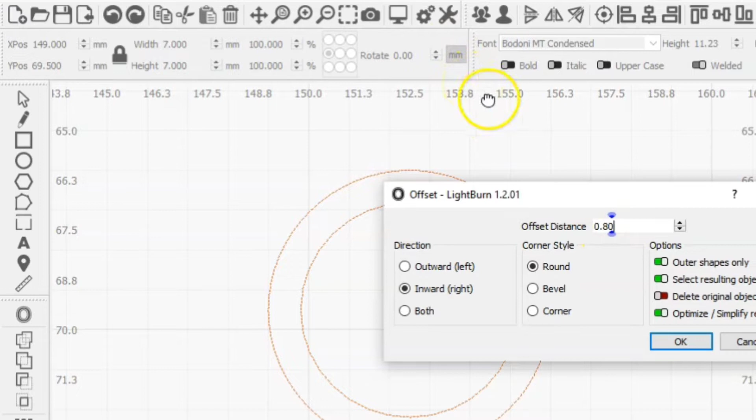Okay, now I'm going to select those two and group them. That's going to be a tool we'll use later to determine the position of the hole we need for the earring hardware. All right, so now...

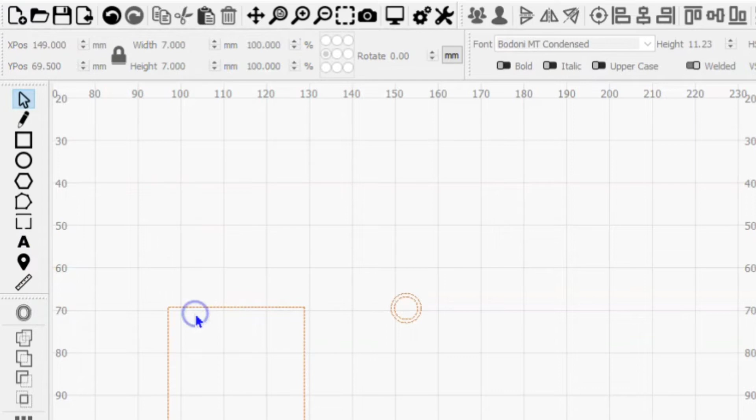Let's start our design. It's going to be on, I don't want to put that on cut path, put that back on the tool path. Select our cut path, and select our circle, and we are going to draw a 1 1/4 inch circle.

Select inches, there we go. 1.25, it's locked, so the dimensions not tab. There we go, there we go.

All right, now with that selected, select Shift and select your tool path. Tell it to align center and align to the bottom. So there's the base of our teardrop.

Now, how do we elongate and create that teardrop shape? Well, we do it with node edit, but the circle is a shape, and if we go to node edit, there aren't any nodes for us to edit. So first we have to select our circle, go to edit, convert to a path. Once converted, go to node edit and now you can see your nodes.

We need to select this top center node and just drag it straight up, click and drag straight up till we get to the top center of our tool path. Now we have a teardrop shape.

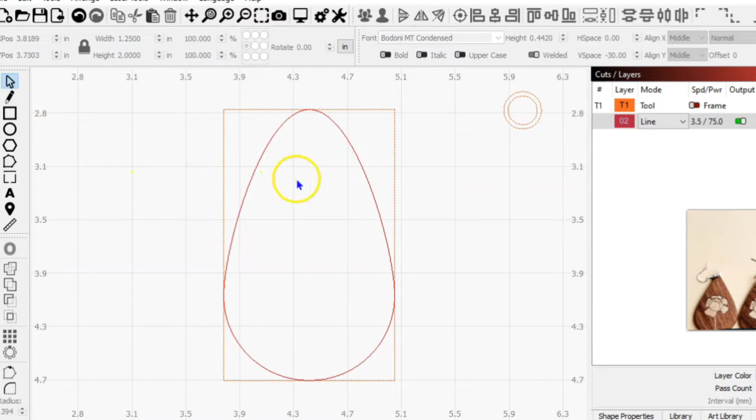Now we need a hole in the top of our teardrop in order to put our jump ring through to attach our hardware.

I'm using a 7mm jump ring with a thickness of 0.8 millimeters, so I double that to 1.6. I draw a circle, set it in millimeters, and make sure it's unlocked so I can position it correctly. It's 1.6 by 1.6. Now I take that, hold shift, select my teardrop, and align center. Then I need to figure out the proper placement, and that looks pretty good by pure luck. But I need this placed in the optimum position to have the most material left around the top, so we have a strong earring that's not prone to breaking once it's caught in hair.

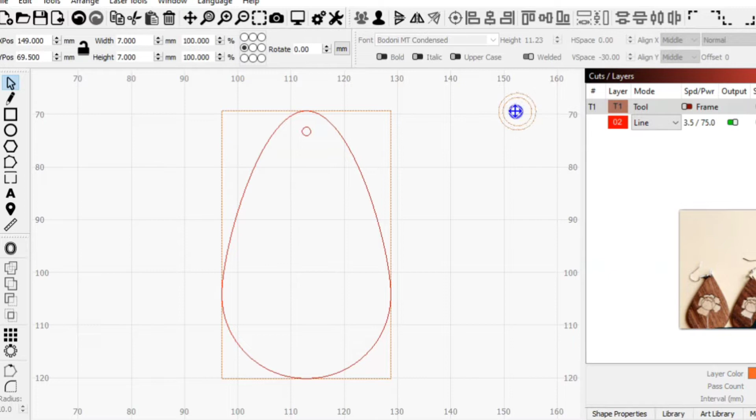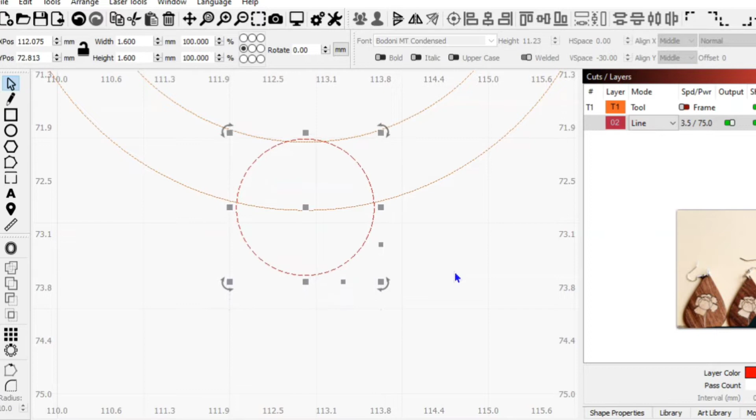Using the tool we created a minute ago, I bring it over and put it on the center line of the top toolpath, in the center position of the earring. Once positioned, I select my hole for that ring, zoom in, and take it right above the hoop. Zooming out, this gives me the most material, because if you take this circle further up, the hoop still works, but the earring becomes so thin it's prone to breaking. So you want as much material left as possible for your hoop. So there we go, that's centered.

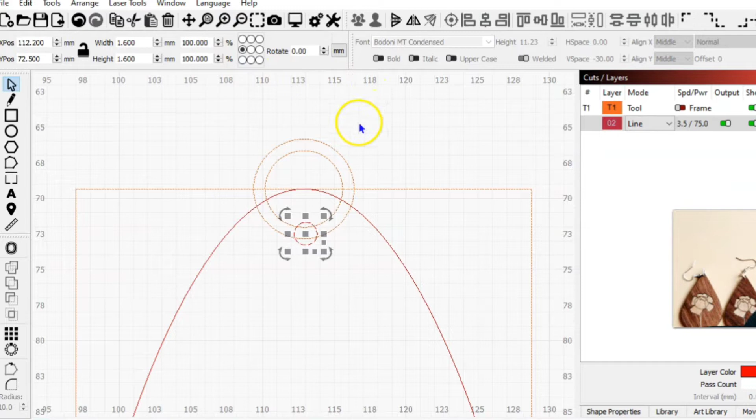That works. Now we need to make sure that circle is centered in our earring. I'm done with the hoop toolpath, so that can go bye-bye. Just select the circle, hold shift, select the earring again, and align center. Now that is the perfect position for the hole for your hoop.

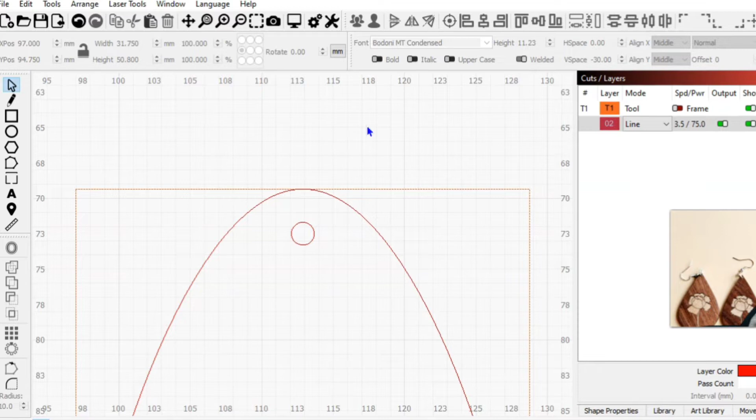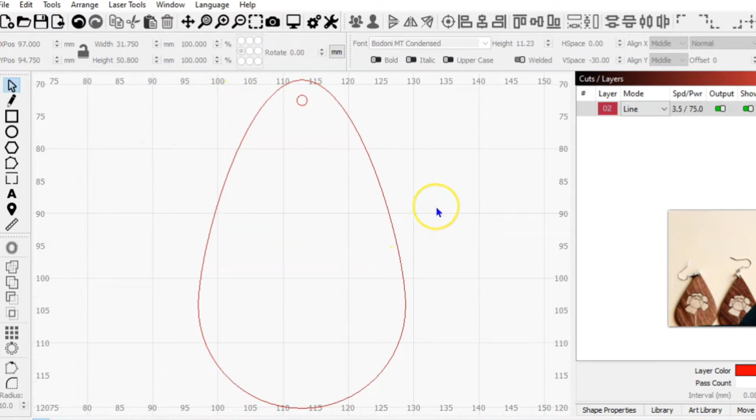Depending on the hoops you use and their thickness, you may have to change the positioning and settings, but that's where you'll need to do your own math based on what you purchase. I'm using a 7mm jump ring with a diameter thickness of 0.8 millimeters. We're done with this toolpath too, so we select it and delete it. Zooming out to just the shape, there's your basic shape for a teardrop earring.

Now I'm going to zoom out, select everything, and group those together. You can take that shape and go off on your own, start putting in your designs, shapes, and engravings. But if you do, you'll miss out on some pretty ingenious design work here. I haven't made one of these yet, but I think it's going to look awesome. I've seen similar designs on Etsy and thought, I can do that—and I can. Now, after watching this video, you can too.

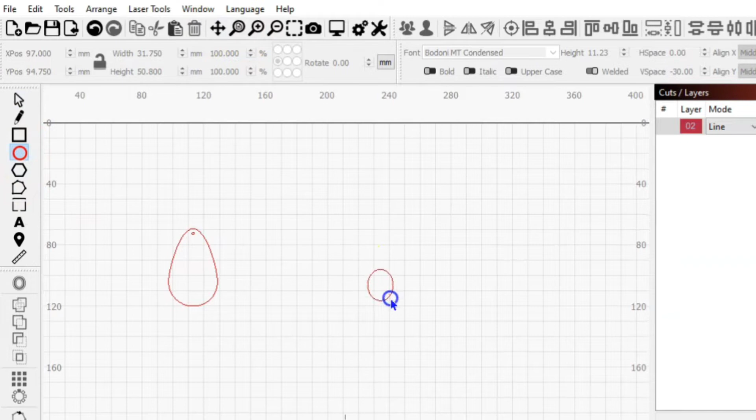Let's zoom over to some clean workspace and draw another circle. We'll use that same 1.25 measurement, switching to inches. 1.25 by 1.25—now we've got a perfect circle that would fill the bottom of the earring. But we're not going to use just that; we're going to use it along with our array tool to create a geometric shape. With that selected, we've got a 1¼ inch perfect diameter—well, not diameter, but circumference.

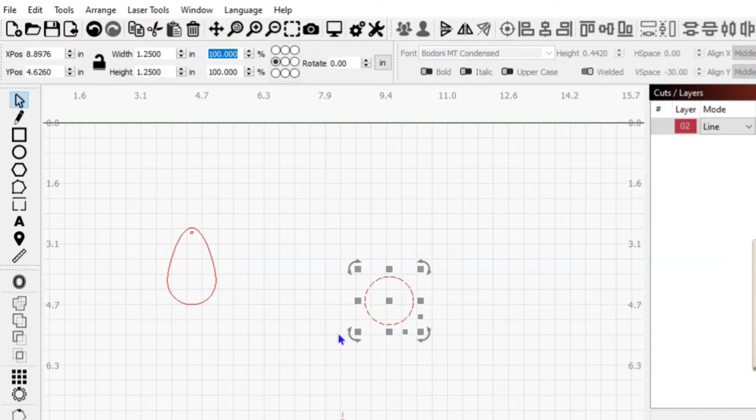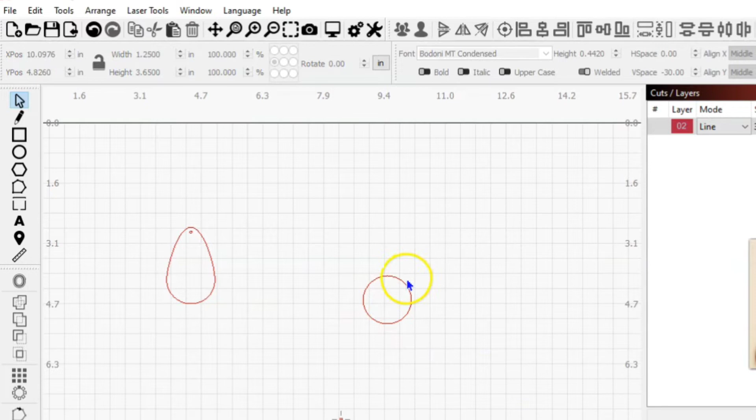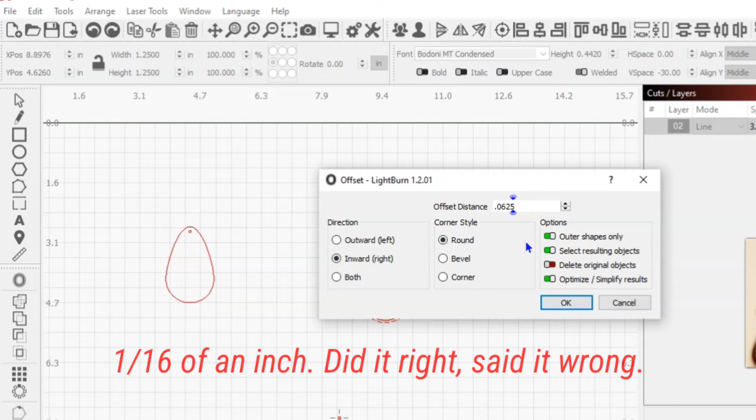Control D, duplicate that. With that selected, move it off to the side. Control D, move that up, and Control D. Actually, I just realized I forgot something—scratch those three, come back to this one. First, we need to do an inward offset. So select our offset tool, and we need to come inward, round, and do 1/16 inch, which would be 0.0625.

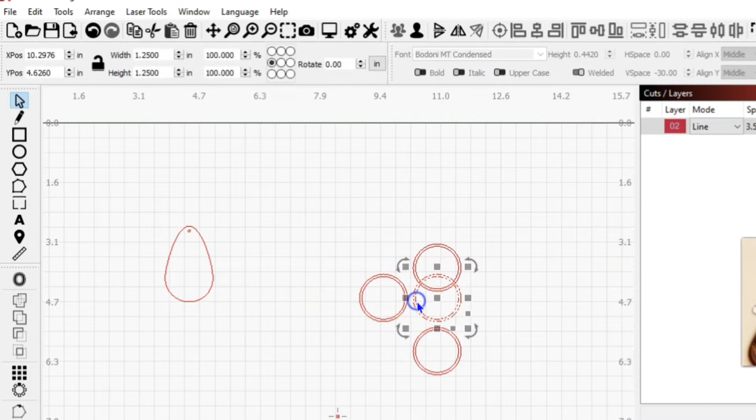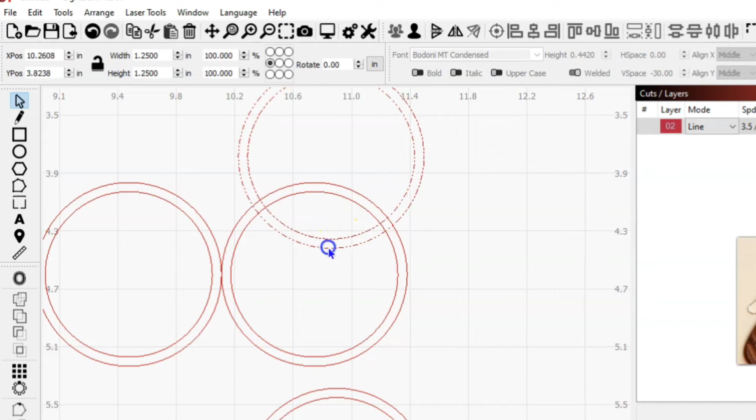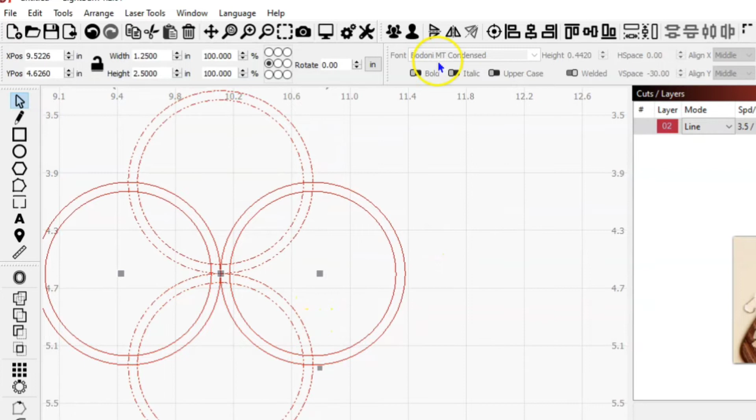Select those and group them. Now with those grouped, Control D, move it to the side, Control D up, and Control D down. Now we're going to align all these to a center point. I'll grab the center of that and bring it over here. Now I want to make sure they're on the same vertical plane, so select them both and align bottom. Now they're lined up. Come to this one, grab it, bring it here, grab this one, bring it there. Now select and make sure they are vertical center. Very good.

Now that we've got those grouped—no wait, we don't have them grouped, those are 4 individual shapes. But we do need to select them. We don't need to group them, we need to select all 4. Then come over to our circular array tool. Now with our circular array... nope, we do need to group them.

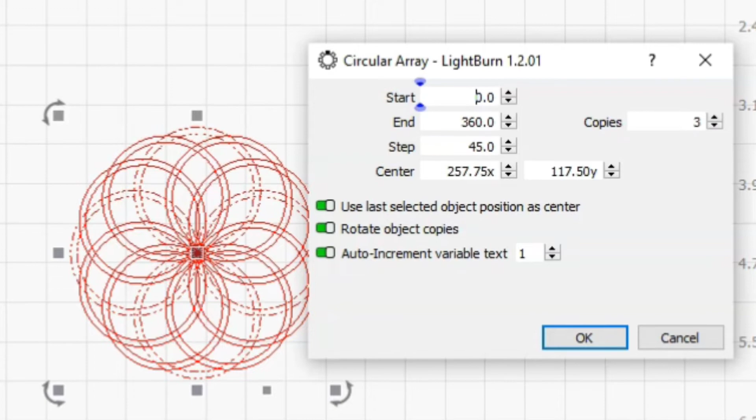Select them all and group them. Now go to your circular array. There's better. We could have got there the other way, but this way is just faster. So select all 4 of the circles, group them, go to your array tool, and now you can create all these different geometric shapes using your array tool.

Now those are 1/4 inch widths of those rings, so we can't make too many of them, or else we're just going to have a whole bunch of nothing. So I liked that group of 3 copies.

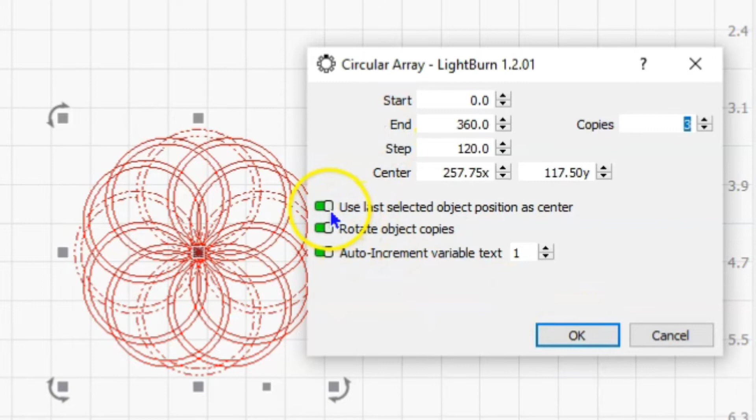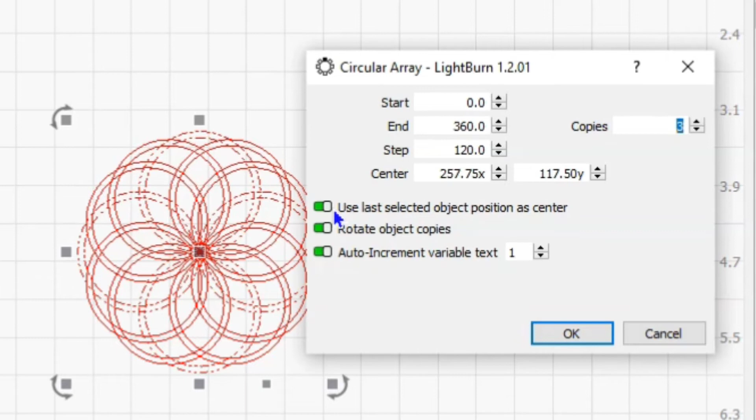Now on my circular array, I'm using the last selected object position as center, and that's why it's important that you group all of them first, then start this array, because it will start to rotate these off of that group's center. If you haven't grouped them all, it's going to create the array, but it's going to start rotating them around the last object you selected.

So group all of them, then start your array. Make sure you have this checked, rotate object copies. And since we're not using any text, this one is irrelevant in this particular instance.

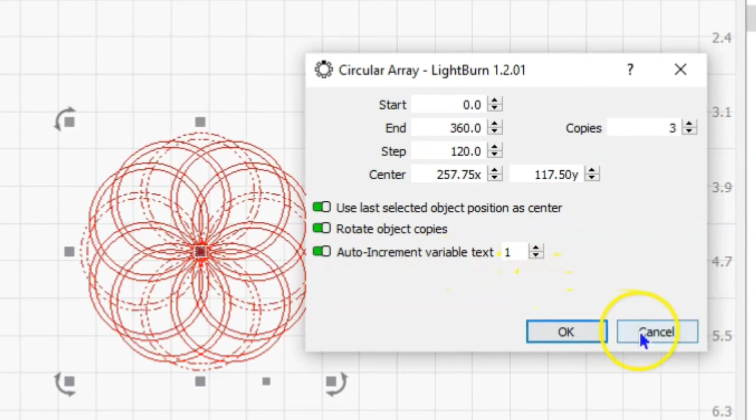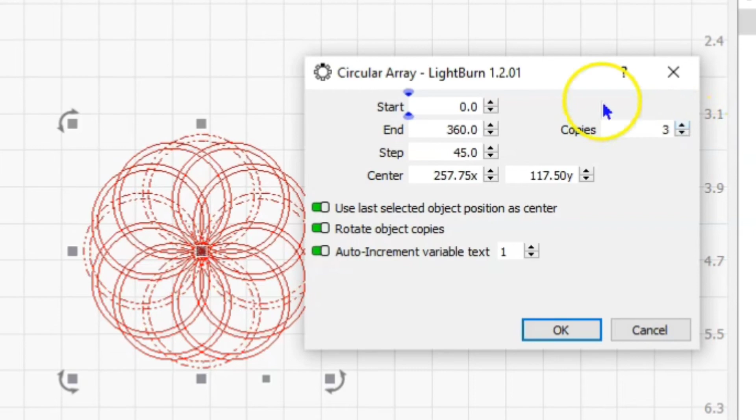So recapping, if you've got these individuals, as soon as you've got them all created and positioned correctly, select them all, group them all, then come over to your circular array, and you're ready to start creating your copies. Now, I like that just as it is with 3 copies, so we're going to say OK. But that is 3 copies of the same original group.

So if we go in tighter, you'll notice all the circles aren't selected. In fact, if we come over to this one that's not selected and select it, now it's only going to select the other 4. Well, we now do not want to group them. We want to zoom out, but we need to select all of them.

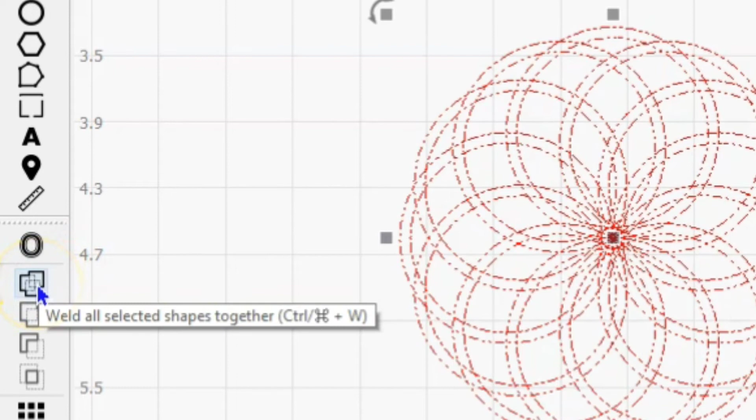All right, so now selecting all of those 3 groups of 4, everything is selected. We come over to our weld tool, because right now we've got all these bisecting and intersecting lines, and we need to get rid of those. We do that by selecting the 3 groups of 4 and then coming over here to weld, just underneath the offset tool, and click weld.

Now all of the intersecting and bisecting lines are gone. We have one solid geometric shape, and that's pretty cool.

So if we select that, we tell it to lock its dimensions, and we're going to take it back down to our 1.25, and select our earring and tell it to align to the bottom and align to the center. And go look at that. It's pretty cool looking.

But there's a problem with this. You cannot cut it out like that, because that outer perimeter of that geometric shape, when it cuts, as it gets over here to this side, it's right up against the outside of the earring, and the inside is just going to fall away.

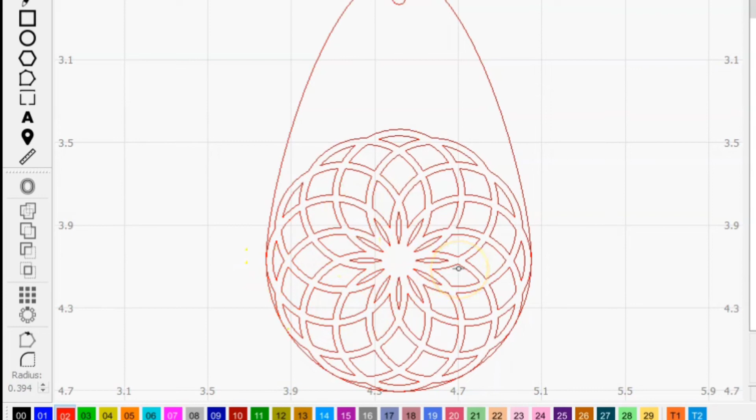You got two choices. You can select that and drag it up slightly, but you're still going to be... actually you've got one choice. Come and hold your control key and just shrink her down. Now you can get that entire design into the base of that earring.

But that's not what I'm after. I'm after something a little different. I want to keep that design as big as possible. So I'm going to take it back to the 1.24 or 1.25, align center and align bottom.

Now with that selected, I'm going to ungroup that entire geometric shape and then select just that outer line and delete. Now you've got the entire size, the original dimensions, and you have a nice perimeter around the base of it. It's centered around the base, nice and even.

That fits better, I think, than just shrinking it down. That's ready to be cut. But there is a problem.

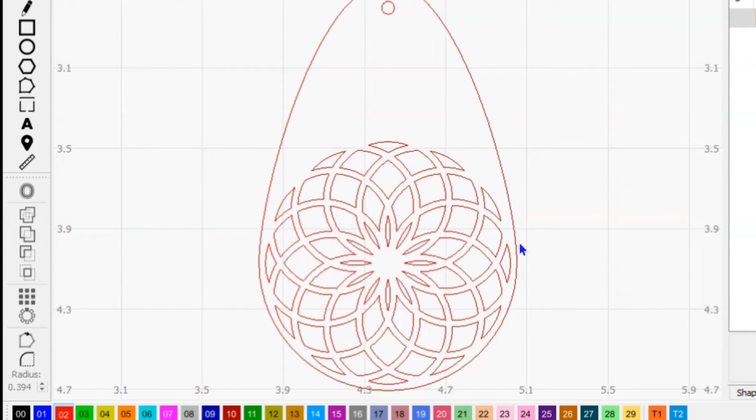Not a problem, but something that if you're not careful—we ungrouped all these, and so if you accidentally grabbed one and moved it, well, you've got an undo tool, but now all those are individual pieces. I'm going to show you a shortcut on how to fix that.

Remember, if we grouped the outer shape and this earlier, so it's all on one path. So temporarily put it on another path. Make sure she's on line so we don't lose everything or have everything hidden.

Now, if you select any one of those on the cut path, the red 02 path, then come up here to your edit tools, come down here, select all shapes in current cut layer. You don't have to draw squares and rectangles around those or go in and select them all. Select one, edit, select all shapes on that current layer.

Now you've got them all. Just tell it to group. Now those are grouped together. You can come back to here, put this back on the cut layer. And now if you decided to group both of them, everything is intact.

And now if you needed to, you can hit ungroup, but the geometric shape is still grouped and you can move it out of the way while you do whatever changes you need to do. But that, boys and girls, was a quick, easy, and I think going to be a pretty neat design.

That's something I'm going to cut out today and cross my fingers that we have a nice project. That's something I see selling on Etsy for $20 for a set. You can do it yourself if you've got the proper equipment and have fun making designs and create your own arrays, do your own designs.